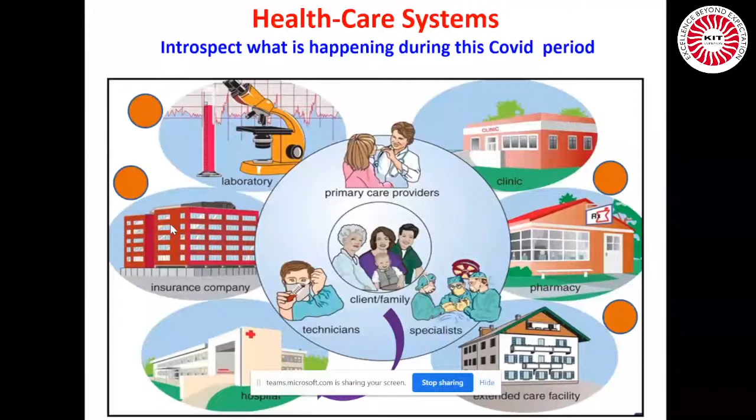A few initiatives in the healthcare system - not that I'm telling for the first time - but today the healthcare system has to look at least about 60% of people who are in remote areas, who are inaccessible. Just an example, if you look at Himachal Pradesh, around Shimla, the city of Shimla, we have around 60 to 100 kilometer radius where people have no access to medical care.

And if they have to get a testing done, it takes 4 or 5 days of hard work for them to go up and down. Imagine such a thing happening in the snow-clad winter days of Shimla, Himachal Pradesh.

Today we are using, in the initial phase, the task of taking blood samples, urine samples, and other medical samples from remote areas, 60 or 70 kilometers, into Shimla's lab, and within a day the results come out, and we have apps which tell the patients and local doctors what to do for the next step of medical attention.

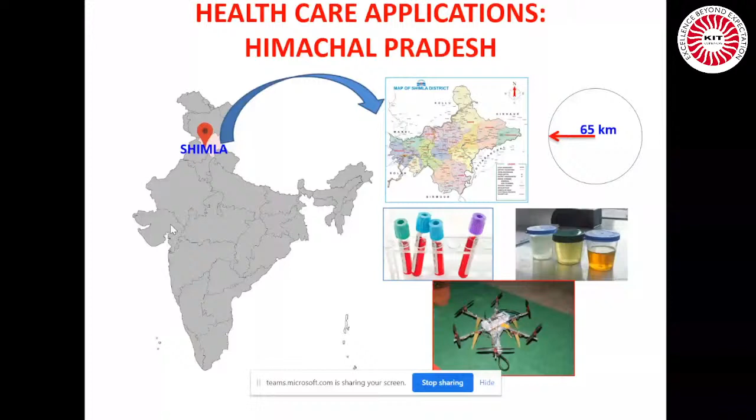Today this is not the case in India alone, it's everywhere, including developed countries and areas in Africa. You can see one of the examples here.

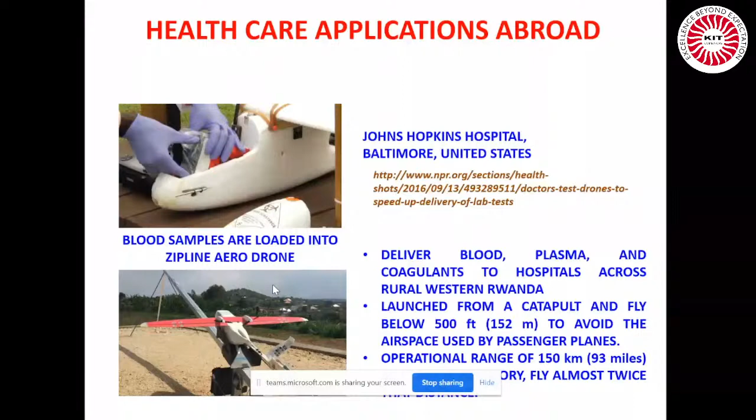I recall very fondly the work we did in DRDO a long time back, maybe 4 or 5 years back, in developing a non-invasive glucometer. You can see the one at the corner.

This is what happened: we took about two years to develop this, because it takes a lot of effort to put them through the medical certification process. But if that can be done, why not today, in today's context, have all the facilities, non-invasive systems, user-friendly, patient-friendly gadgets and medical devices, which may include even non-invasive malarial and tuberculosis systems. There's a lot of opportunities.

The reason I'm mentioning this is it's not medical sciences alone, it is a lot of engineering. This particular thing has been delayed because we are not able to productionize it. We need to make it compact, we need to make it affordable, and there's a lot of engineering which has to go into this. That's the reason I'm presenting this as a case.

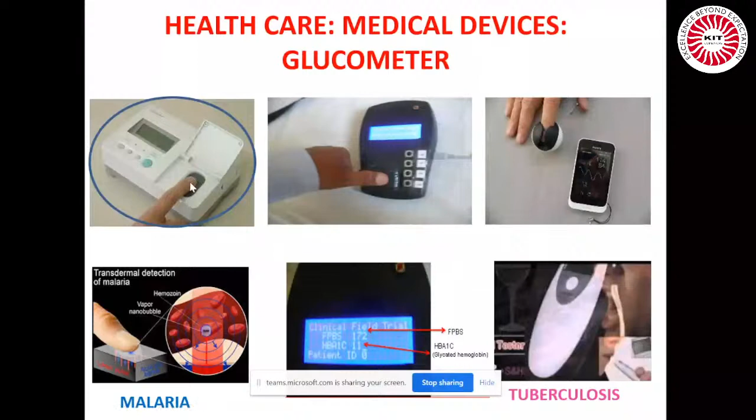Now there are issues of accidents in urban situations. I can see a lot of remote areas where people get into medical emergencies, and we have rural area accidents. If you have GPS-based systems, and if drones can be summoned to that location, and if the drone can spot the location and see the condition, it can immediately alarm the police and medical systems to approach quickly.

They can easily take care of the so-called golden hour and see if the accident victims need any particular help. That can be handled within a short period of time. Otherwise, we don't know where they are and how to locate them. All these things can be done by the system.

Imagine another serious case, one where everybody is affected - medical emergencies where an organ is transported from a donor in a donor hospital to another city. Take the two examples of Bangalore and Chennai: if somebody is going to donate an organ and it needs to reach Chennai within a couple of hours, it takes enormous effort in today's context, because you need to take the organ, put it into a container, and transport it to the nearest airport, or a railway station for that matter, but an airport is more likely.

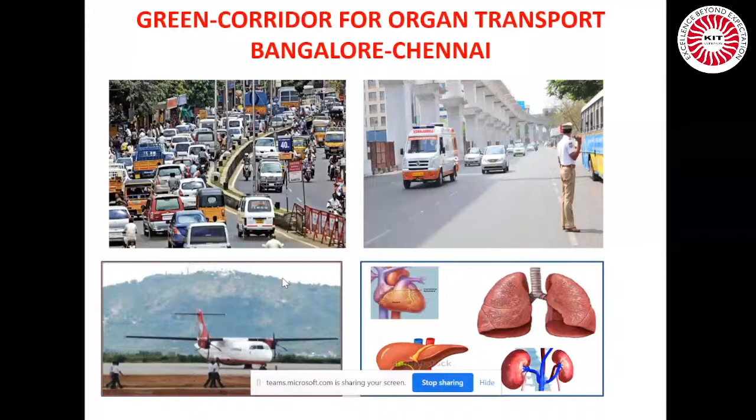But the important thing is these organs have a very small shelf life when being transported, maybe 2, 3, or 4 hours. Therefore we need to develop drones - we know drones, but we need drones able to handle this sort of payload, a very critical medical payload, and fly from one hospital to another across cities and rural areas within good time. These are some of the projects which are going on.

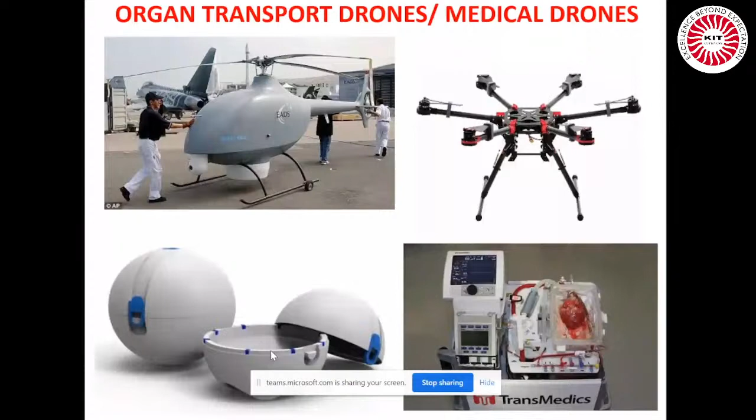You can see the hexacopter, which is able to carry, for example, 20 to 25 kilograms of payload - the container in which a heart, lung, or kidney is packed and transported in a passive way. You can see this particular container, which is a passive container where the organ is kept in an ice box with medical sanitation fluid.

But this, when transported, is good only for about 3 hours, kept at about 4 degrees centigrade, but this is not good enough. Whereas if you use another type of active container, called a perfusion container, where the organ, like a heart, is pumped with fluid, blood-like fluid or blood itself as sanitized fluid, and kept active and pumped, the heart keeps beating, and it's again kept at about 4 degrees centigrade. But it's not a passive container, it's an active container.

These devices are there in hospitals today in the operation theaters. But the challenge is, can we make them small? Can we make them affordable? And can we use them for lifting in a drone?

This is the challenge, and therefore the case for a group project of a multidisciplinary and interdisciplinary nature. It is not interdisciplinary within the engineering fraternity alone—it is engineering, biomedical engineering, and medical, the doctors themselves. So I know it's a very difficult job for students to do independently, but it has to be supported at the institution level. Already there are a couple of projects around, but I think we need to put in a lot of effort.

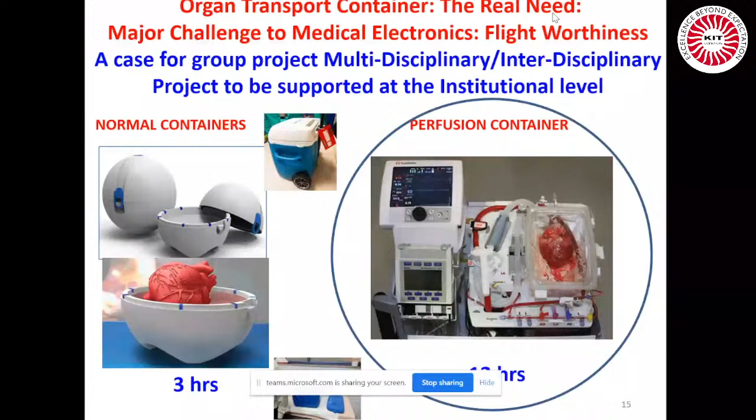All over, to be able to achieve this target of an active perfusion container, which will make the organ healthy for about 12 hours, not just 3 hours. Which means it can be transported from Delhi to Trivandrum, and it's possible to do that. Today it's a very difficult task. To charter a flight is very expensive—it costs about 20 to 25 lakhs, maybe 12 lakhs. And therefore, it is something which you must do.

And talking in the same frequency, we are talking about, as an immediate future, the bioprinting of organs. We have done a lot of work—I'm sure Dr. Dilip Babu and most of your faculty members understand the advances made in the 3D printing process, not only for plastics but metals. Today we can make engineering parts, aero engine parts, automobile parts in metal by this process of 3D printing, directly from the CAD model to a product, done layer by layer. This is something we are all comfortable with today, and a lot of advances have taken place.

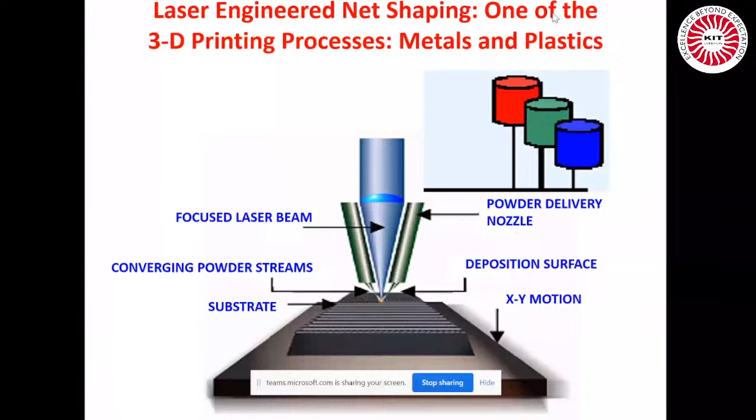You can see today people are able to do skin tissue. The basic process is to introduce a skeleton, called the scaffold, which gives the shape of the part into which the medical, biological processes are introduced, and you mature the product, and it becomes a living tissue. It is like a biological part, like a part of our body, and this is possible. There is a lot of effort going on for a complete heart or kidney—you can look up the literature, and at least 2 or 3 startups have started in India, and a couple of institutions have started this work. I think we need to look at this possibility of bioprinting.

We have been talking about this for a very long time, but not much progress has been made. And since you have people from medical colleges around the engineering colleges, why not try? But it cannot be done in one go. Rome was not built in one day, and therefore you need to start somewhere and put in some mechanism of dissecting this—decompose it into doable small elements of work and connect them up to come up with a technology that can do this. This is not really a big emergency today, but unless you start today, you will not be able to get into that.

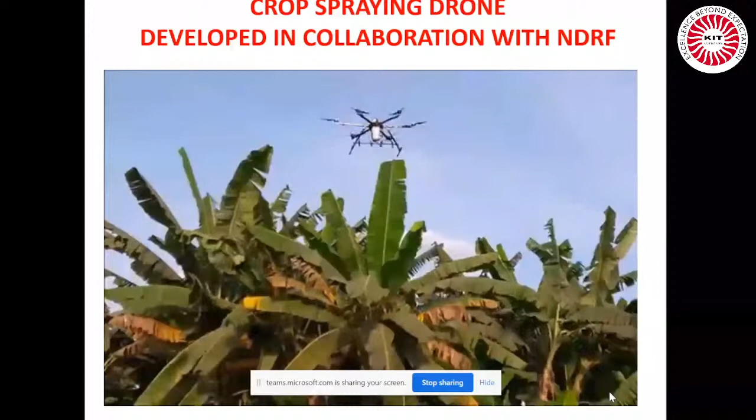And all this can be done automatically by a more intelligent drone system. This is something which is very important, to augment the capability of drone systems by infusing artificial intelligence to make the best use of the resources that we have.

Using this, it is possible to survey a large area of agricultural tract or an urban scenario at a particular height, and this is something you must be able to do. There are a lot of issues involved in this. As an aeronautical engineer, some of you will understand the effect of the transition between going up to a particular height and dashing off. That transition between vertical lift and horizontal thrust is very interesting, a good challenge, and you must be able to handle it.

Several workforces, groups have already started, but why not start this ourselves?

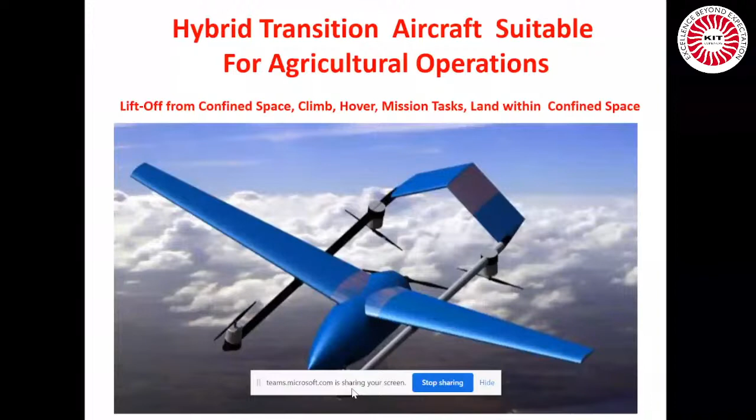One important aspect of the drone is its use itself. Take an agriculturist, a farmer, who normally in our situation owns a very small holding, just a few acres of land. He can't afford to have this system and operate it.

You should have training to do that. It's not readily available. So why not service provider models like Uber and Ola, where you, as engineers who understand these systems, own these drones as many as required.

Like combine harvesters and tractors are being used as cooperatives in northern India and maybe southern India as well, you can have drone operating systems used for several applications, maybe for land survey, maybe for spraying, maybe for any other agriculture purpose. You lend your services, take responsibility for operating this, and help farmers do their farming very effectively.

So this is an Ola and Uber type of operation. Why shouldn't engineers take this initiative? It's not necessary to have drones only in cities, in an urban scenario. It has to percolate down to remote areas where it is required, but they're not able to offer it, they're not able to operate it.

So what is the requirement for this? You need to have certified agri-drones, agricultural drones. It has to be certified. DGCA will not allow you to otherwise operate. So how do you certify drones?

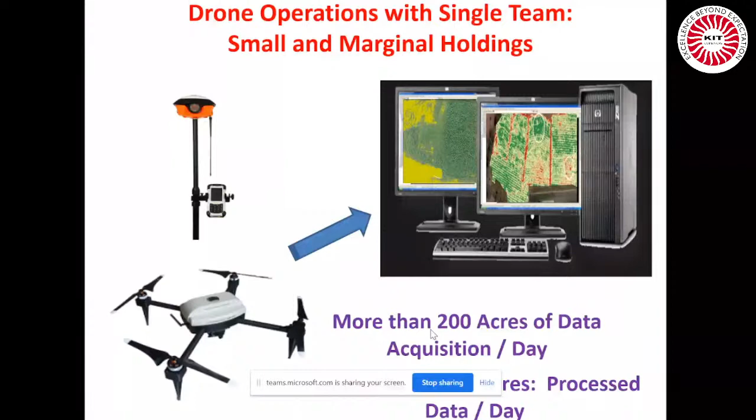Now, from typical agriculture to aquaculture, there are a lot of issues with aquaculture. Aquaculture is the cultivation of, for example, fish and prawns and other marine products. An important thing about aquaculture today is water quality.

If water quality goes bad, within a day or two, the farmer, the aquaculture pond operator, loses several crores in 3-4 days, and that's a terrible loss. This is not acceptable, and therefore we need to continuously monitor the quality of water.

Today, we don't have good facilities. We take sample water from the boundaries of the aqua ponds, or take a boat and pick up samples, then wait for 3-4 days to get the water quality parameters tested in a lab.

So why not have autonomous water sampling, water monitoring, water quality monitoring systems? And also, if something goes bad with the water, what sort of chemicals should be sprayed or added to the water? Can you use oxygen to aerate the water to mitigate this water quality depletion?

These are particularly very important because of a lot of labor shortage, and so can we address a couple of things like that, that is the issue.

If you look today, these ponds are typically spread all over the coastline of the country. You have a huge business potential. A lot of people are doing very routine, mundane work, but the profits are very high, though the losses can also at times be very high if you don't maintain the water quality. So how to do that is something we thought about.

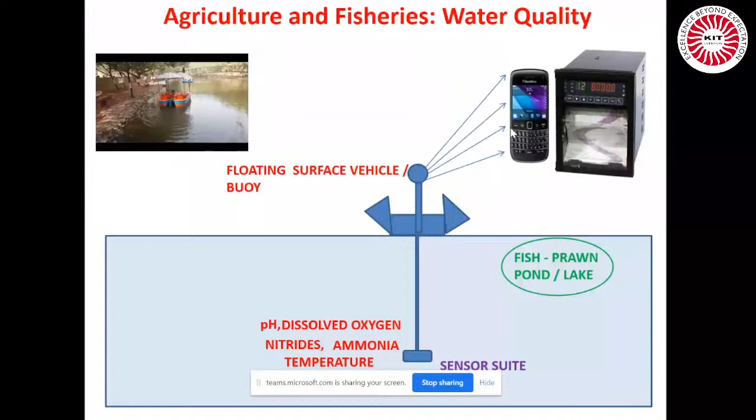So if you find that water quality is bad - the farmers today actually use paddles on the periphery of the ponds, whether it's 20 acres or 2 acres. They touch only the periphery, and using paddles driven by IC engines, they keep agitating the water. It's very crude, very symbolic. Water quality is not going to improve very drastically. They're doing it, but some of them are managing.

But to me, it appears, as an engineering person, you would expect a lot more practical things to do. Why not have a floating boat with paddles, which is programmed to move all around the entire surface continuously, including night. So you have a 24/7 water aerator, which does the aeration or introduction of oxygen into water by this particular system, which is again a demonstrative version, and therefore it is noisy.

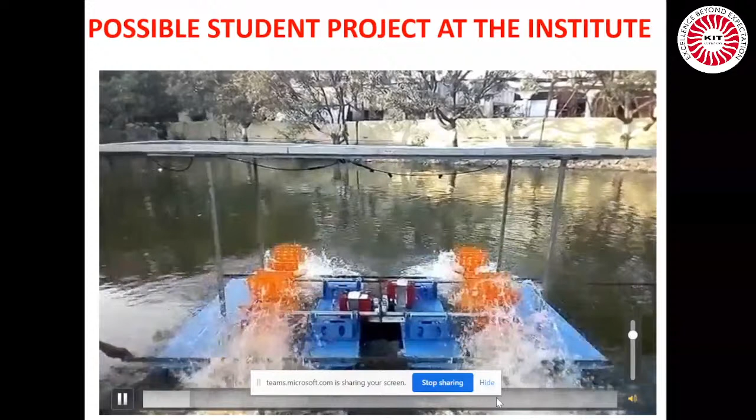Sorry about that. You can see it is paddling. It is an autonomous boat driven by batteries, and we have a solar panel. The initial work needs to be completed and maybe brought into a production level.

And this is what I was saying. Here is that boat which is paddling, and this is disturbing the surface to introduce oxygen. But that may not be good enough. And therefore, why don't you have a pump which draws water from below the boat and puts it out as a geyser, as a fountain, and the water goes into air and picks up oxygen and drops.

So we have a boat which is moving, which is paddling, which is also pulling out water and aerating it in air. But at the same time, can I not also use a compressed air compressor to push atmospheric air into water at a certain depth, very gently, not to disturb the fish and prawn in the pond. And therefore, you have aeration below water surface, on the surface, and in the air. So you have got a very effective, highly effective oxygenation of the aqua pond, and this is something very, very useful.

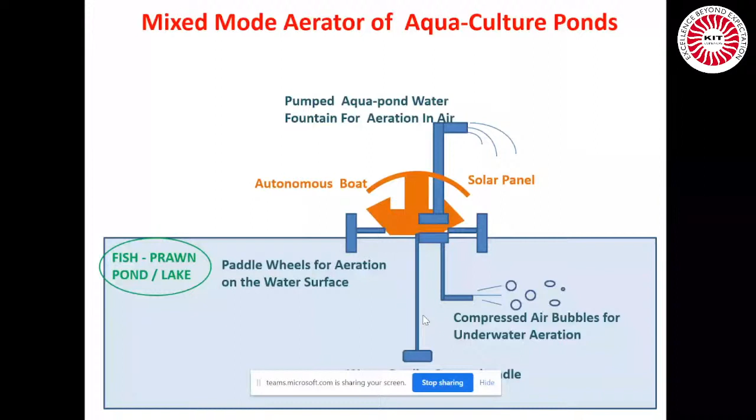So you need to look at innovative ideas to increase the effectiveness of the system. Can I add also the water quality monitoring system, including camera system. So you have a very comprehensive aquaculture autonomous boat to do a lot of things at the same time. Imagine in the area, several ponds, each with one such boat, all connected to the fisheries department and the owners of the ponds.

It's not just confined to aqua ponds. This idea can be extended to look at the nuclear radiation levels of seawater or ponds in and around nuclear power plants, where there's a very high possibility the radiation levels will be high. Can we not monitor, in addition to oxygen levels and temperature, using a Geiger-Muller counter which can track the nuclear radiation levels and also the temperature?

It is important that nuclear reactors do not pass very hot water into the surroundings, so temperature and radiation levels can be monitored, and this can be augmented with underwater vehicles. Today we have a lot of underwater vehicles which can be programmed to work with these surface boats to do nuclear radiation safety monitoring in coastal areas and in and around nuclear power plants. This is something very important.

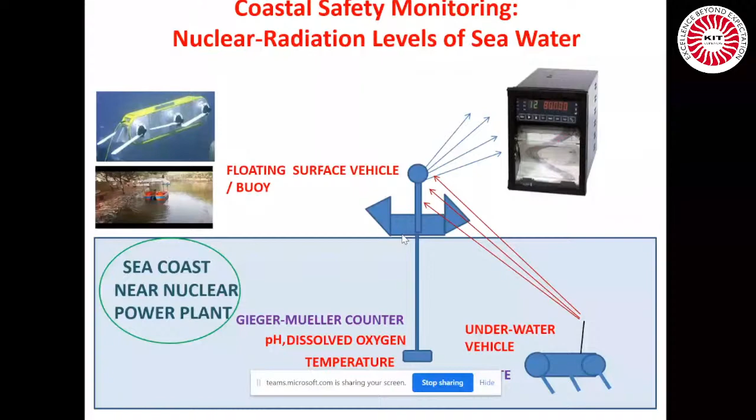We're talking about underwater vehicles. There are a lot of autonomous underwater vehicle technologies being developed and studied, and efforts are being made to make them affordable. Here are some snapshots of several types of underwater vehicles. Most colleges, I suspect even KIT, may have an underwater vehicle program. But the important thing is their utility, their usage, how to make them usefully used to achieve certain objectives.

Now the important thing is the ability to communicate. Can you control the path of this underwater vehicle? Most of them are tethered; they can go up to 100 meters by a cable connected to a controller. But can it be made autonomous?

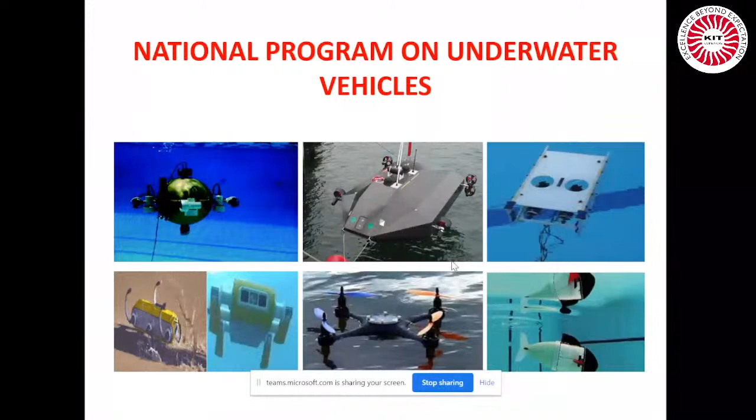And how to communicate with the drone which is below water, from a controller which is above water in the air? So the communication between the air medium and the water medium, to make this move around the way you want and do the tasks it is expected to do - there are a plethora of very useful underwater vehicles, and I think we need to launch this sort of vehicles with reference to several things.

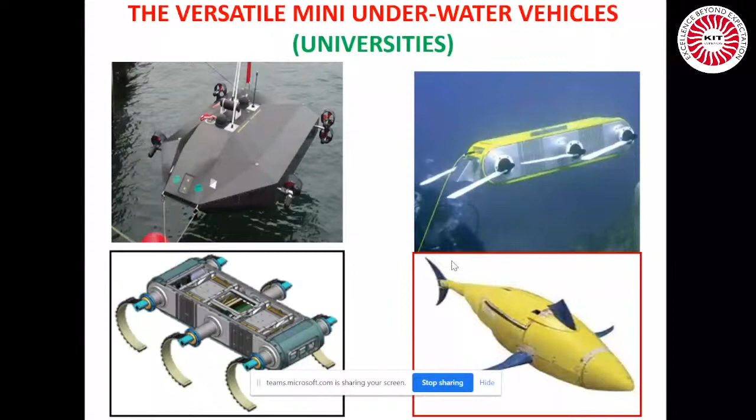It is a very difficult thing to inspect these structures continuously through divers who go down and take pictures. But if you have underwater vehicles, they can be made to continuously run and capture images of critical locations in the structure. And therefore, the application - you have the vehicle, but it's not the end of the program or the idea. The idea is to use it usefully to complete a very difficult task very affordably.

So this is something which you did. Now, I was talking about the water quality monitoring of aqua ponds. It is not necessary to have only moving vehicles, boats and underwater vehicles. We can do a simpler job using buoys - floating spheres, for example, which will have the ability to sense water quality.

And they also have internally a power supply and a camera system. If you have small buoys spread all over the aqua pond, and if you connect them all together, you have achieved the target. You don't have to have very complex moving objects.

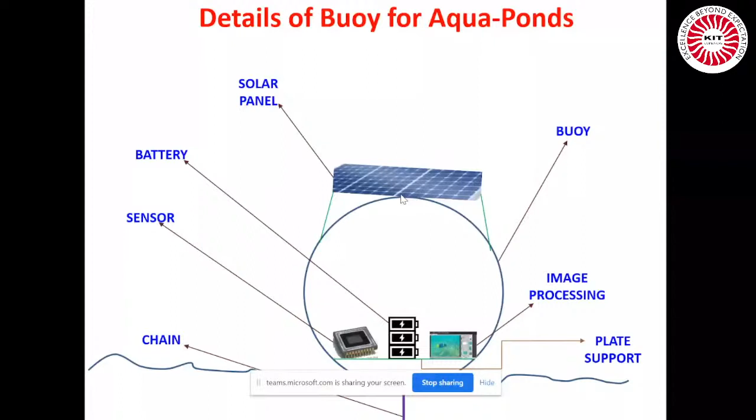You can see a buoy which is there. It has got sensors which can be immersed into water and pulled out if required. It's got its own battery system, data processing, and also a solar panel to make it more user-friendly in terms of power required. This is affordable, and it can be done by several students as a batch. So this is something which I thought I should mention - the use of buoys for aquaculture.

We have many societal applications, which are not high-end but important, really required for day-to-day work. You can see the civic amenities, the ambulance, firefighters in the urban areas. We have the application of drones, and there are a lot of issues with industrial areas and urban cities for pollution monitoring, weather monitoring, and environmental monitoring. So this needs to be done.

Here is an example which is already available. You have mobile library systems which are there, to which you can go and pick up, but they are not really user-friendly. In today's context, a lot of people are not able to move around, especially the aged population. So can they have this library facility at the door, on command, on request? Smaller one, it may not be a big library, but it gives you a preference. It is like the apps we have for delivery, like Swiggy or Big Basket. You have this facility of reaching reading material, books and magazines to the elderly, to people who cannot move out, and this is all based on app-based technologies.

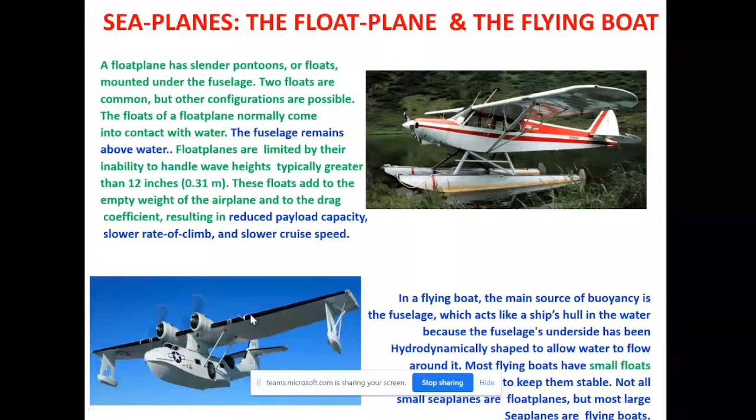You must understand why we are talking about seaplanes. They are supposed to be comfortable, ecologically friendly, which may or may not be economical, but time-wise it's going to be much more economical. I am not too sure about less noise. But what is important is the access to remote areas that do not have runways for normal planes to land. The greatest advantage is runways are not required for their use.

I can foresee from the city center in Coimbatore, for example, from the airport, you can have a seaplane ferrying passengers and luggage from the airport to the local pond. It takes a very small area of a pond to land. This is an advantage of seaplanes. You can see the specific feature of the seaplanes.

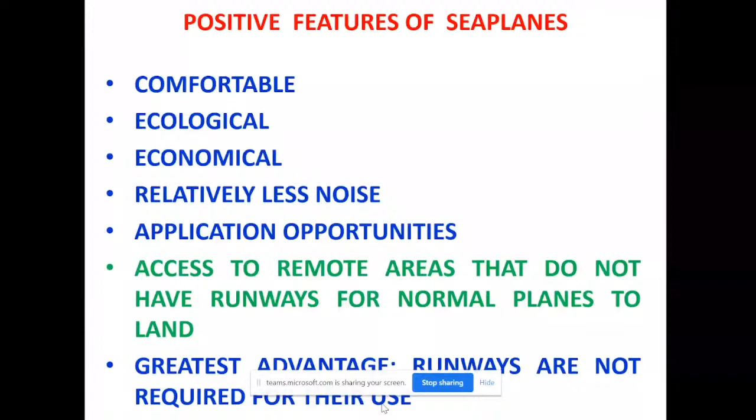I don't want to go into the physics of this, but it's a wonderful subject to study. As aeronautical engineers, mechanical engineers, and even control engineers, there are a lot of things to learn from the way these seaplanes work. It's a shame that we have not done any effort in our country to put in.

They have commercial value. They can be used for passenger traffic and also for tourism. In fact, within Bangalore, we have several lakes, and it's possible to connect Bangalore city center with the airport.

It's about 10 to 15 minutes of flight from the airport. Otherwise, it takes 1.5 hours today to commute between the airport and Bangalore city center. So there is a lot of things that needs to be done.

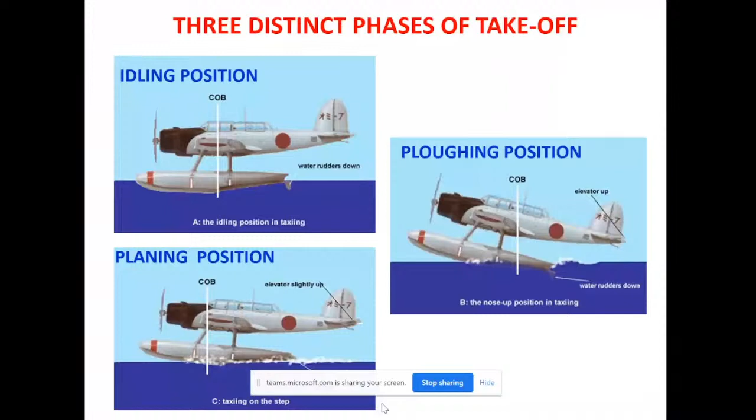More than this, this issue is important. You can see that seaplanes are a major requirement in urban scenarios and even for forest fires. These seaplanes have been extensively used, apart from helicopters, for dousing forest fires. But in our context, urban fire is a major thing.

Today in Bangalore, and maybe in Coimbatore, we have very tall buildings. If there's a fire, it's very difficult to reach the top floors of the building. And within the traffic system that we have, you are going to waste 1.5 hours using both firefighters and ambulances to reach the spot. So this is something which should be done.

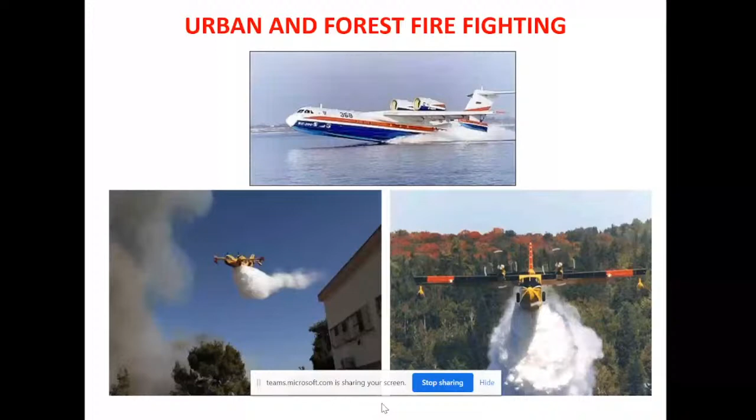Is it not possible for the college to support student projects to develop technologies for sucking water while the seaplane is taking off, or when it is stationary, and demonstrate the possibility?

Raman, Dr. Ramachandra cut off. It looks like the audio went off, no? Dr. Ramachandra is not online, or I don't know. I'm asking the person. Mukundam sir? Mukund sir? Sir, Ram sir, kindly unmute yourself, sir.

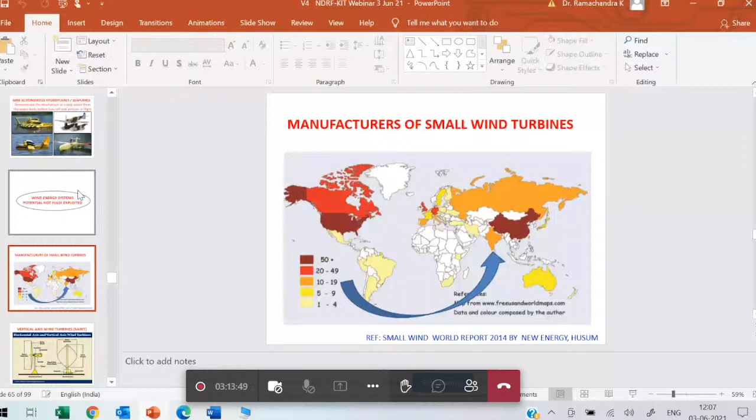Yeah, okay, so this is what I wanted to tell. The institute should support this sort of activity where you can demonstrate the mechanism to scoop water from a water body and take it during takeoff or before takeoff, and jettison it in flight. So this is something which I thought I'll mention.

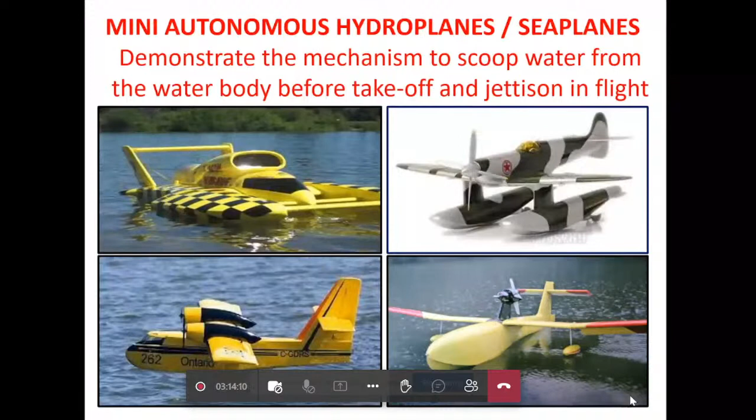But let me go back to a slightly different topic, the wind energy system, which is not fully exploited in my opinion. We are not talking about big wind farms, we are talking about the ability of developing small power through small wind turbines, vertical axis wind turbines. This is a slightly older slide in terms of statistics, but we are in the middle, or the fag end, of the ability to manufacture small wind turbines, install them and exploit them. We have reasonably good wind conditions in the country - we're not the best, but still we have a lot to exploit, and this is something which you must use.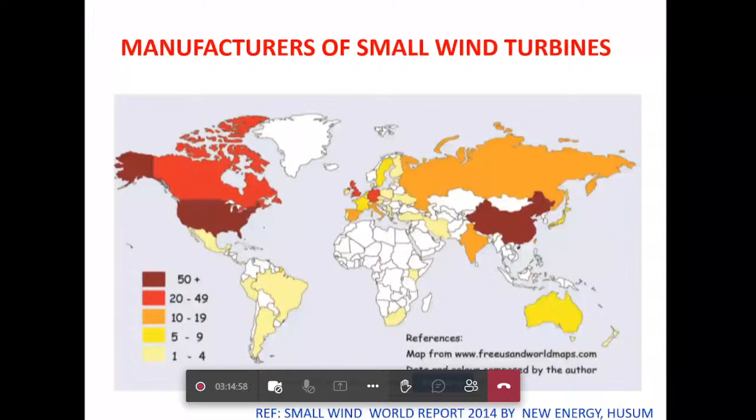We are talking about small wind turbines, not horizontal axis - we're all aware of what's happening there - but the vertical axis wind turbines. People have extreme views about this, but the vertical axis wind turbine has the unique advantage that it is not dependent on wind direction. So it responds to any wind direction, and is therefore amenable to developing 3 kilowatt, 5 kilowatt, 10, 15, 20 kilowatt small power, which can be used.

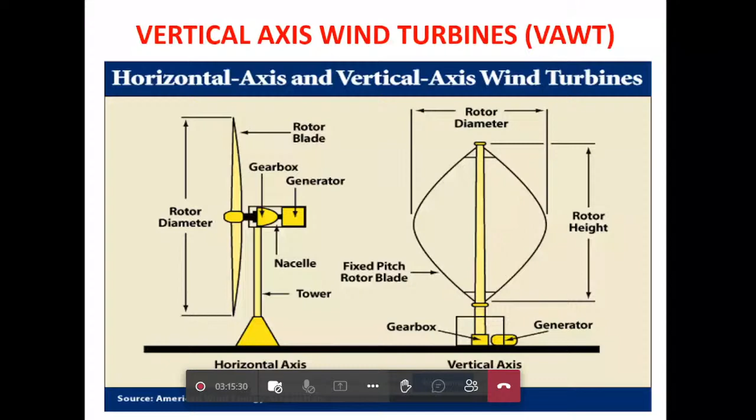An advantage of this is it can be networked. It can be on top of the building, between buildings, in front of the building, on the ground, and they can all be networked to develop power. It's very suitable for small village communities or even urban communities.

An important thing is we can use the vertical axis wind turbines along with solar, so it's a hybrid vertical axis wind turbine supported by solar power. Therefore there is a possibility, but we've not done enough work in understanding this. We've taken a very extreme view that they're not suitable for our country, but that's not true - we need to assess it properly.

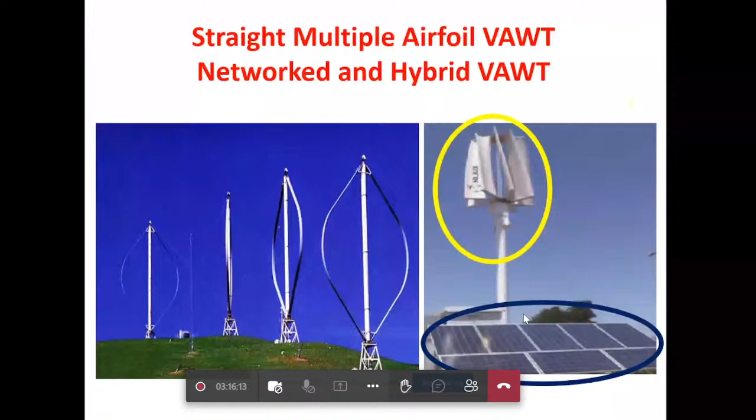Quickly, a few things on automotive and aerospace engineering. I'm very happy that KIT has an aerospace or aeronautical engineering department, and I'm sure some of them will appreciate and look at this as a possibility.

Now if you look at the automotive sector, it's a very sad thing that none of our indigenous cars have actually passed the crashworthiness test. The type of material used, the protection required, the energy to be absorbed due to impact to protect passengers - it's all a matter of economies of scale, economies of production, and the type of material we use. The bottom line is, none of our cars have been able to do that. So what do we do for this? We need to work on it.

I was remembering work I did for Siemens looking at the crash of an automobile, similar to a four-seater Maruti-type car and a slightly bigger one, finding out the requirement for crashing - the speed at which it should be tested, the value of G, the deceleration value, where it's most optimum to put a sensor and trigger the airbags. If you don't trigger it in time, you're triggering the safety bags too soon or too late, so it's very troublesome. There's a lot of work needed to understand the strain energy response of the system.

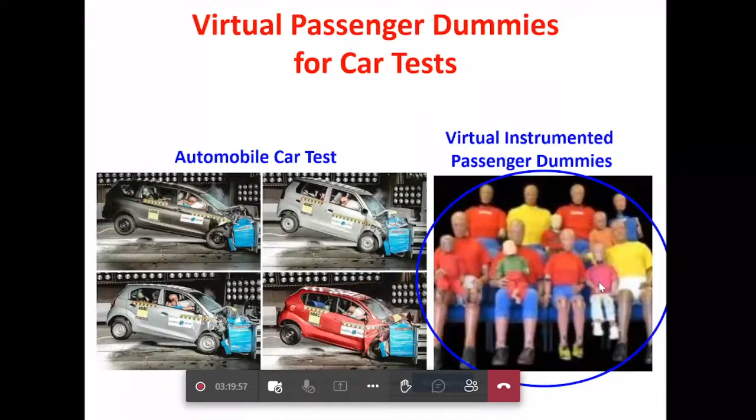So the second part of the automobile topic: today we are talking about e-mobility. Everything is going to be electrical by 2030, 2020 is the target, but even if it's 2025, everything is going to be electrical power, no diesel or IC engines. Therefore, today it's limited by the duration, the endurance of the battery, which can allow the car to run for maybe about 100 kilometers before needing a charge. So charging stations and bigger power batteries are important to make this happen by 2025 and 2030.

But in the meanwhile, as an intermediate stage, can we not use automobile range extenders? We've been working on these range extenders, which are nothing but a gas turbine or IC engine-based charger that charges the battery when needed. You're starting the vehicle in Bangalore today and going towards Chennai - continuously the battery power level is being monitored, and whenever it goes below an optimum level, this range extender kicks into action and starts charging the battery to bring it to a comfortable level. So this range extender is based on an IC engine or gas turbine.

A little pollution is there, no doubt - it is the antithesis to e-mobility, but the range extender is an important element because today range is limited to maybe 200 or 300 kilometers, but big trucks have to run for thousands of kilometers. So can we not think of a viable range extender with very little pollution, but the ability to charge batteries and extend the range of automobiles from today's limitation of an average of 100 kilometers to 1,200 kilometers as you go along? This is possible today, and it's been done.

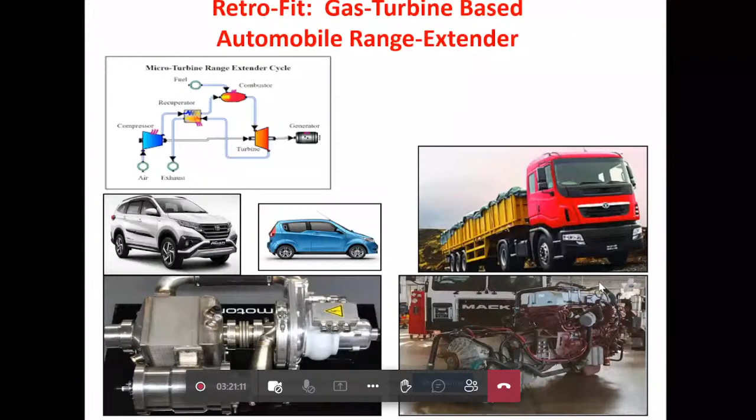In fact, for flood response, to help the National Disaster Response Force, if they have these small hovercrafts it will help the job much, much more. It also has recreational uses, and of course military use, and mass transportation is possible. So hovercraft is something aeronautical engineers can really look at as a laboratory experiment in itself, not just a project. There is a good chance we will have hovercrafts in application.

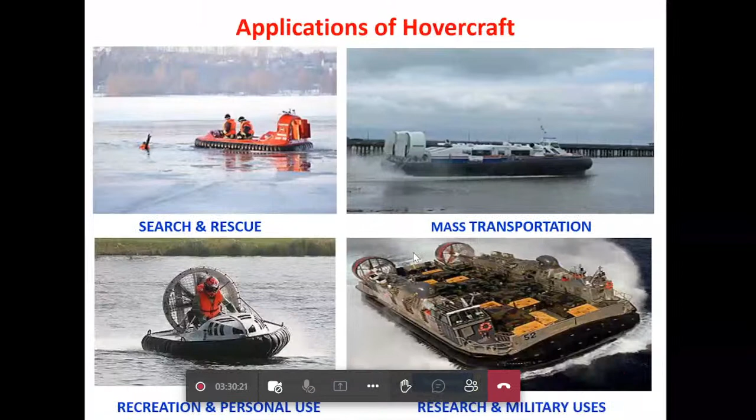Other applications, I'll skip some since I'm running short of time. So the alternate to batteries, which are limitations for drone endurance, is the fuel cell. Today's fuel cells are expensive, first thing, and second, they're bigger. So can we use miniature versions of the fuel cell? There's a plethora of fuel cells, but you must select and miniaturize the right type. Already there are fuel cells on high altitude drones to give them the longevity and endurance required. So some initial work in chemistry, chemical engineering, mechanical engineering and power engineering needs to be started. Fuel cell, in my opinion, is a lifeline as far as we're concerned.

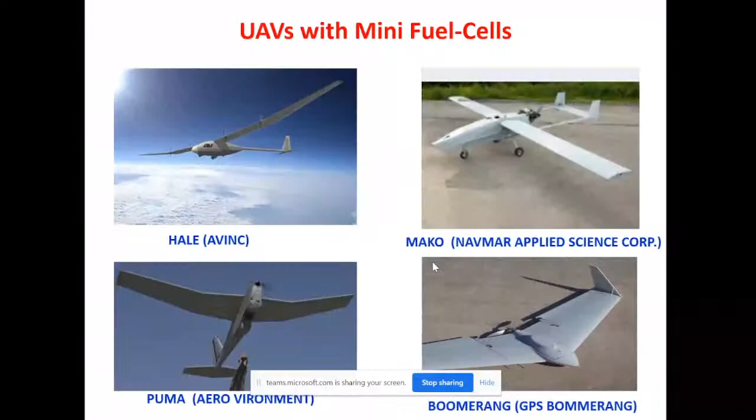I want to end with a last set of slides, and I'm sure Dr. Anandray will be very familiar with this, he must have done a lot of these things already. We have a need today for high altitude, long endurance platforms. We had a couple of student exercises, competitions, and design reviews, and there is a need for this platform. What is this platform?

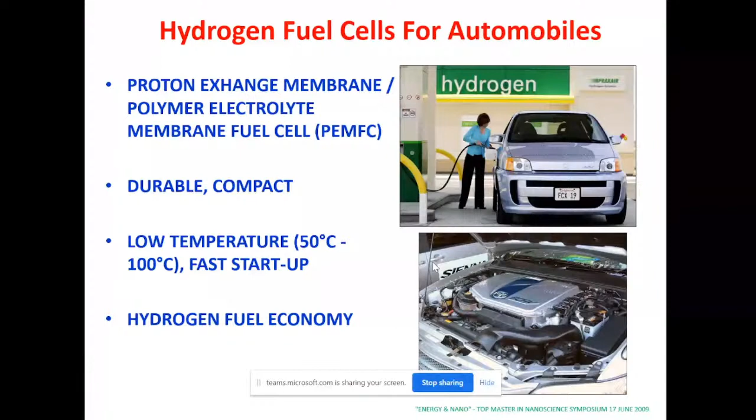Before going to that, students in engineering colleges have already demonstrated their ability to integrate themselves multidisciplinary, interdisciplinary, within colleges, and many colleges coming together as consortium models have developed lots of satellites being launched by ISRO, and that's a great thing. In fact, very recently, maybe a month back, we celebrated the launch of 3 palm-sized satellites in a recent ISRO launch, and Dr. Anandray was also there. This is our ability, the students' ability, the colleges' perseverance to do these things.

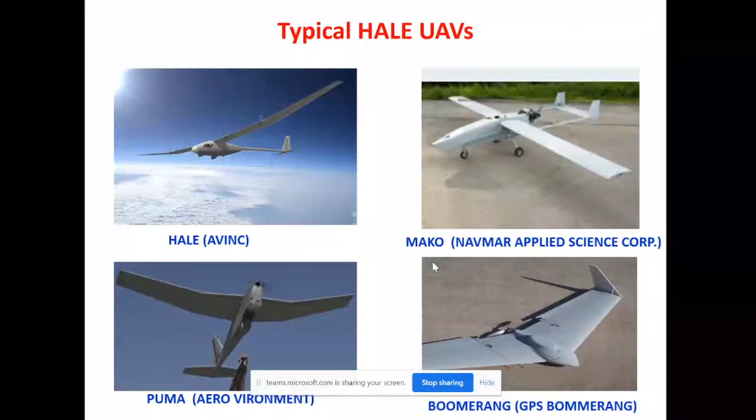And if that can be done, why not this? Why not high altitude, long endurance systems, platforms, basically high altitude long endurance aerial platforms? The Army is interested, civil applications are there, so why not launch programs like this? These HALEs are pseudo satellites, very similar to satellites, but at much lower altitude. They are in the stratosphere, approximately 25 kilometers altitude, but must be able to carry about 100 to 150 kilogram payload, which defense systems or meteorological systems, for example, can use.

They must hover at any design station for a few weeks, not a few hours, a few days. For example, this platform, HALEAP, can be launched, say, around Balasore or Calcutta, and then it can follow the coastline and reach maybe Kanyakumari or Chennai and stay there for about 4 weeks.

Monitor what's happening on the ground in the naval system in our Indian Ocean, and then go into the Arabian Sea, go to that place, maybe Bombay, maybe in a pre-deployment thing, or you can go to the coastal theater of war, for example, and be there for another 4 or 6 weeks gathering information on what's happening on the ground.

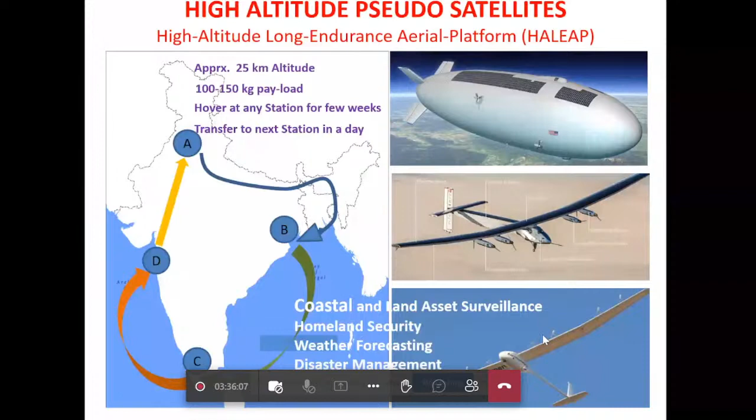So that is a rush job of telling whatever I had in mind to tell you. What you need to do is to exploit the potential of any of these ideas, or any similar ideas which come to your colleges and your faculty. We need to exploit them to reach societal and business potential.

And this project to be selected by the students cannot be the whole thing in one time, so it has to be part of this small system, but ultimately they should all lead to technology and product realization.

What is the end objective of the small thing that we are doing, and how it ultimately reaches the end solution, is something you must have. And focus on realizable innovation and futuristic technologies, which should be driven by societal requirements.

What I suggest - I'm sure from what I heard from the principal and the vice principal, you're already doing a lot of things - but you must make it more. You must passionately take part in national and international product and design competitions.

I'm not too sure, I'm not in the education administration system, but I'm sure you have an honors degree, and I think you should aim at it. Not because it is an honors degree, but it pushes you to the edge, makes you think and train yourself much more vigorously to get an honors degree if you have the system in your mind.